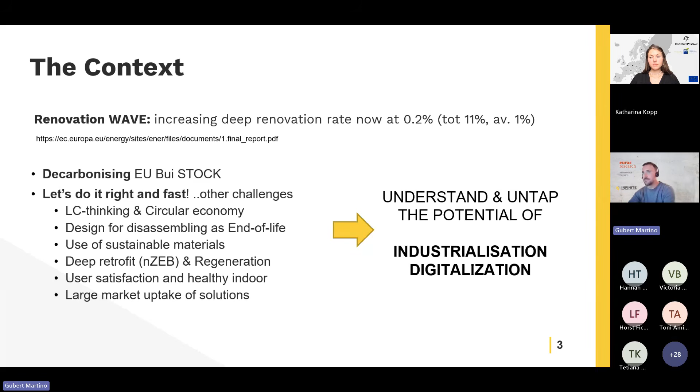We think the best solution is to go for industrialization and digitalization of the building sector. So the main concept behind the retrofit concept of Infinite is industrialization - moving the manufacturing of the renovation from the site to the factory, and then from the factory back to the site again, just to install it in a faster way.

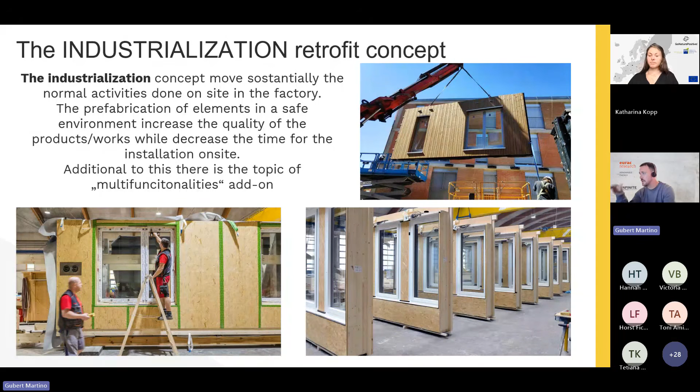The peculiarity of Infinite is also adding a set of multifunctionalities. So not just a passive prefabricated facade, but adding a set of multifunctionalities that I will present briefly.

Within the project we have 5 main pillars. We have stakeholder engagement in the center - all the activities we've done so far try to engage as much as possible all the stakeholders in the value chain.

Then we have a set of development technologies. We developed 5 different industrialized kits for the retrofit.

Then we developed methods and tools, so a BIM platform with a set of plugins to perform the analysis from the architect's point of view.

Then we have demonstrators - 3 real demo cases, one in Italy, one in France, and one in Slovenia, where we test these new technologies.

Then we work also on business models and exploitation - how these kinds of activities can go ahead in a sustainable way. Today I'm mostly focused on technology and demonstration.

So what are the technologies? We start with the prefabricated wood-based facade or roof element, and then the idea was to add 3 different cladding systems and integrating elements.

Regarding the cladding, we have the green, BIPV - building integrated photovoltaics, colored and hidden so you cannot see the cells - and then BIST, which is similar to BIPV but is solar thermal.

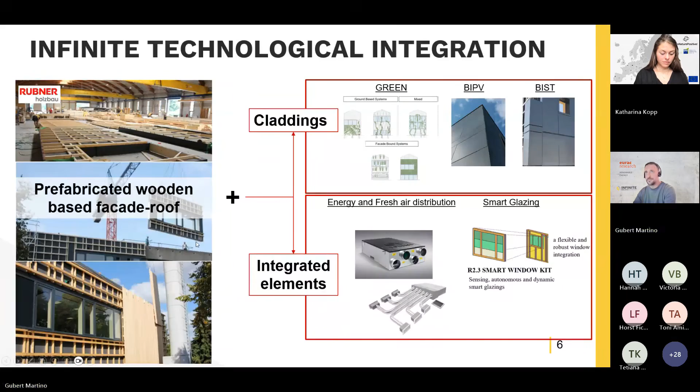So just some insight from the mock-ups we did. We did several mock-ups - I'm just showing the one that includes the green facade.

The concept for the green was a complex system based on several layers: the prefabricated wooden-based facade, and then at the external part we thought to include a green element.

So the first question is: which kind of green solution? We started to define a set of criteria for this green module to be applied to the facade.

First, it should have low weight, because the facade without any cladding is already around 60 kilograms per square meter. If you apply this kind of solution to an existing building, you can probably reach 80-85 without having any structural problem. So we need low weight, low thickness, because we already have insulation in all the layers.

We already have about 20 centimeters or so, so we cannot add another 30 centimeters, because otherwise we'd have problems with the distance to other buildings and so on. It should also be easy to install, have a reasonable cost, and the possibility to pre-install off-site.

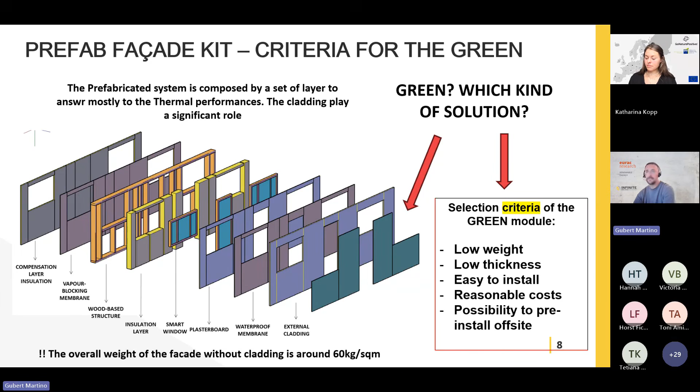We started the analysis and evaluated different solutions for the green. Self-climbing plants were not so interesting in the beginning, because the greening happened quite late. Then we looked at climbing plants, and then living walls.

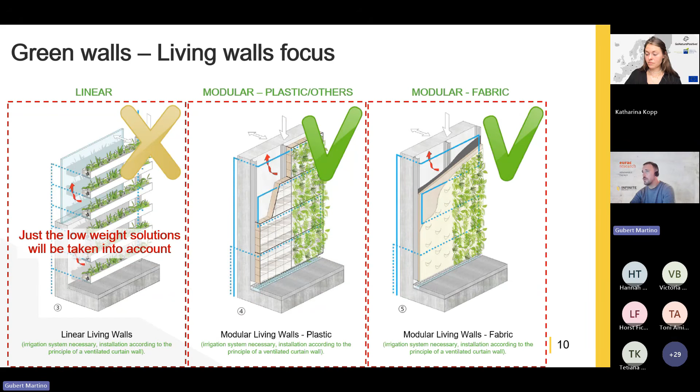Based on the criteria we selected, the most promising solution was living walls, but we kept climbing plants as a possible option too. We then determined that linear systems were not suitable due to high weight and thickness, so we moved to modular, fabric or not.

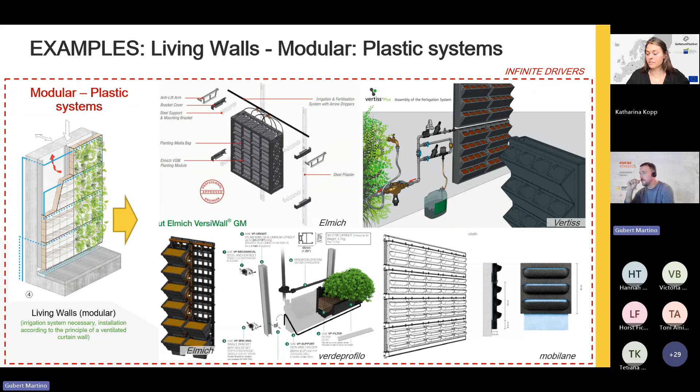This is an example of the sheets we produced, a sort of market analysis of different solutions that can be applied for each of the systems I presented before.

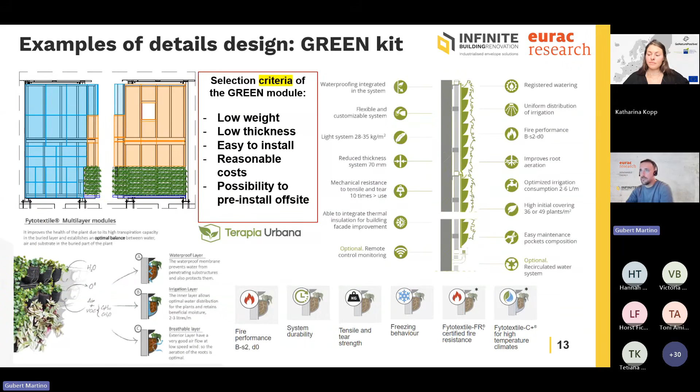Then we started designing the mock-up. It's a fairly large mock-up, 16 square meters, south and east oriented. In this case, we selected the Terapia Urbana solution, which matched most of our criteria.

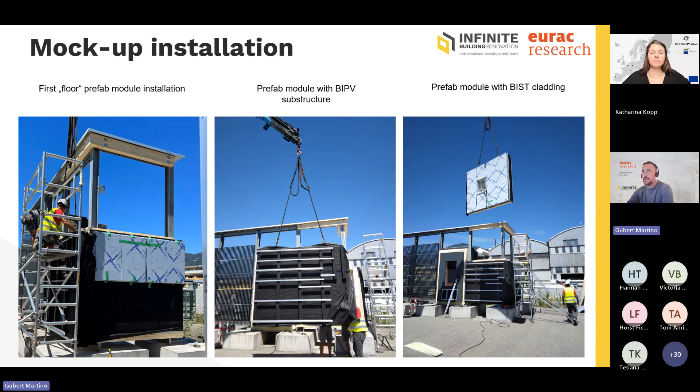We realized the mock-up at the manufacturer's factory as a prefabricated element, then installed it in our lab at Eurac, followed by installing the green element with all the plants within it.

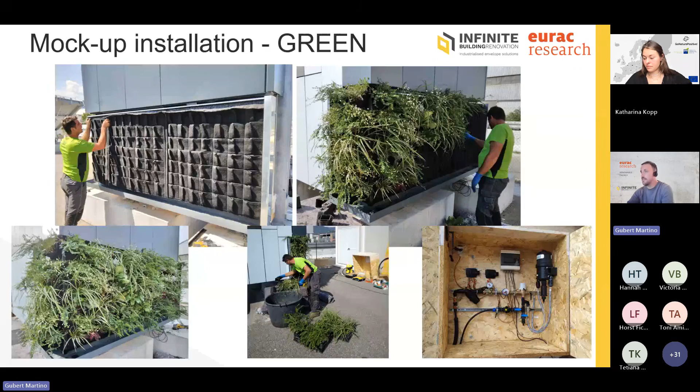We planned a very extensive monitoring campaign, monitoring the rear ventilation gap behind each cladding. The final result is this mock-up.

Based on the results, the green solution shows lower temperatures at the back of the rear ventilation gap, but we are still working on writing a paper on this topic.

Jumping to the end, I'd like to show real cases we are doing right now in Infinite, just to demonstrate the potential of this industrialized approach. We have three demo cases.

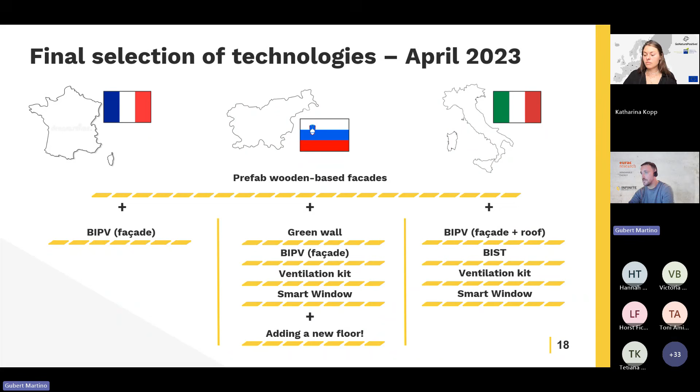I will focus mostly on the Slovenian and Italian demos, since the French one is only related to the BIPV facade. We coupled different kits in order to retrofit the buildings to ZEB level.

First is the Slovenian demo. As you can see, it's a quite large building with low-income people living there. Here we applied a retrofitting concept with prefabricated facades, but also a densification concept.

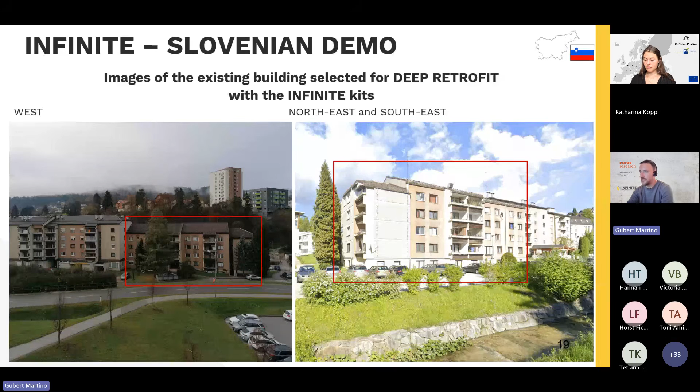The concept was: remove the roof, add a new floor, and then apply all the retrofit solutions in order to achieve the ZEB level. We did this last year.

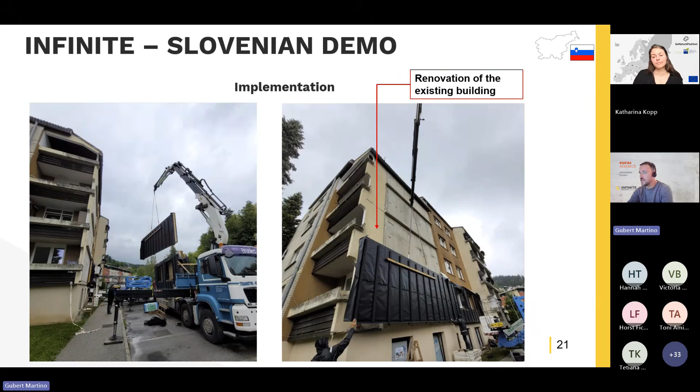These are the prefabricated facades just attached to the existing building with quite large insulation panels. For the upper floor, we also realized prefabricated elements with ducts and ventilation units embedded at the factory, adding an additional floor.

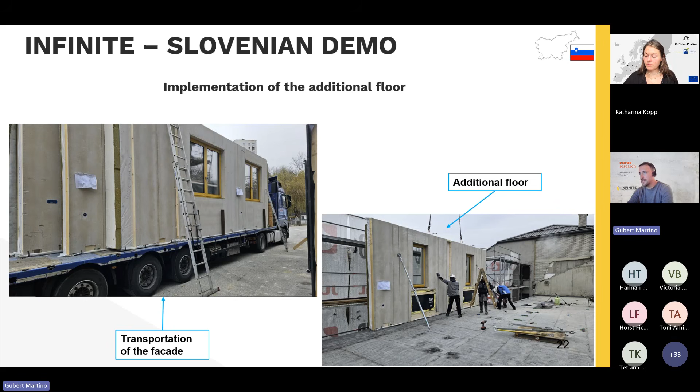On the upper floor we realized 6 new apartments that the building owner sells to pay for the rest of the building retrofit. It's a very nice business case we're evaluating now from a cost perspective—we'll run some simulations and give more feedback in the following months.

Regarding the green solution, in that case we only had the opportunity to install a very small modular element, but it was still interesting for the owner, since this kind of solution could be added on terraces to create a small green space, possibly providing some refreshment during summer.

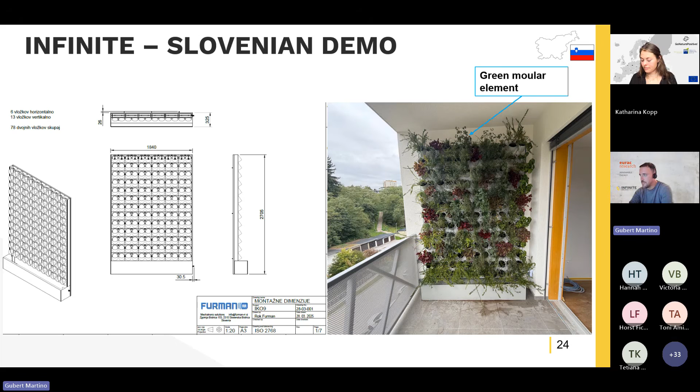Regarding the Italian demo, it's quite a small building, but we applied the full solution we had. In this case we couldn't add a new floor due to structural reasons, and also due to structural constraints we had a weight limit on the facade.

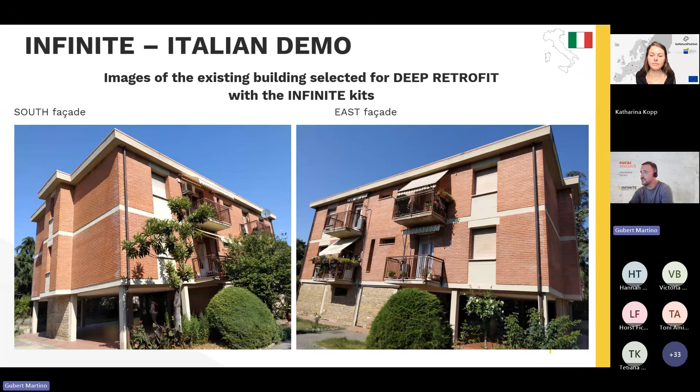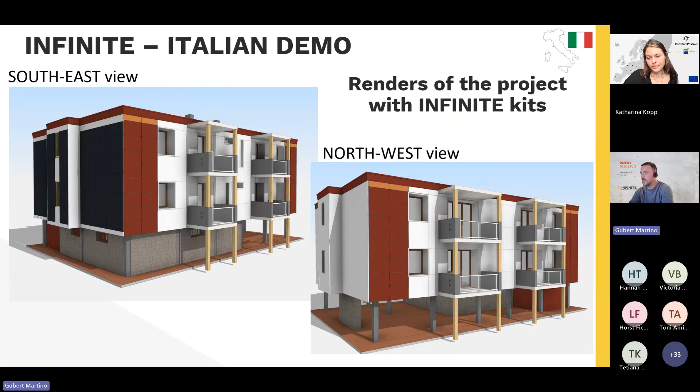The concept was to cover the building and create new balconies with the ventilation unit embedded into them. We had a very extensive design—as you can see, there's a double skin all around the building with these prefabricated elements, which was quite nice to integrate.

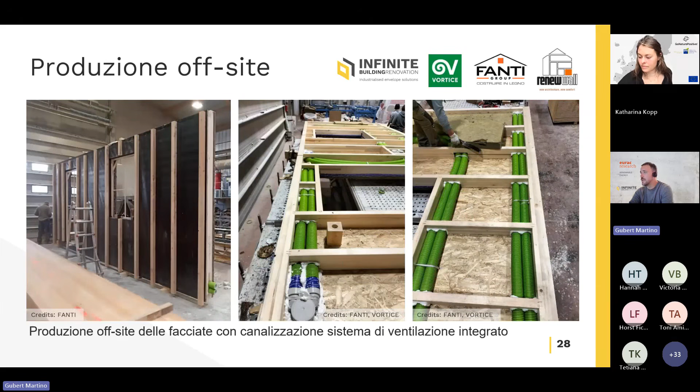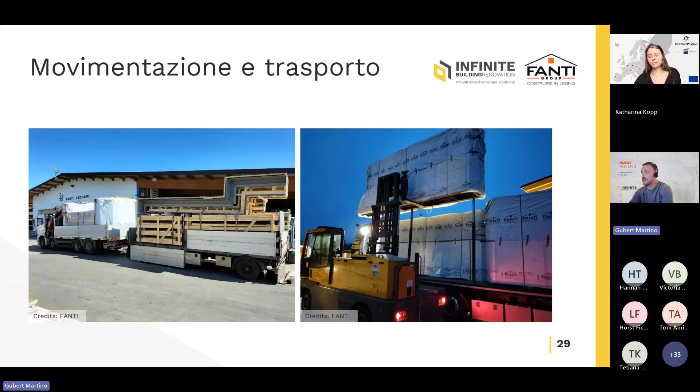We realized it in the factory in North Italy, including all the pipes within the prefabricated wooden base facade. Then there was transportation from North Italy to Florence. Then from Florence, it was just applied to the building.

That application was very fast. Of course, the preparation of the sites takes a bit of weeks just to prepare the buildings, but then the installation of the facade itself takes just a few days. The level of prefabrication was very high, so we arrived at the end having very nice results.

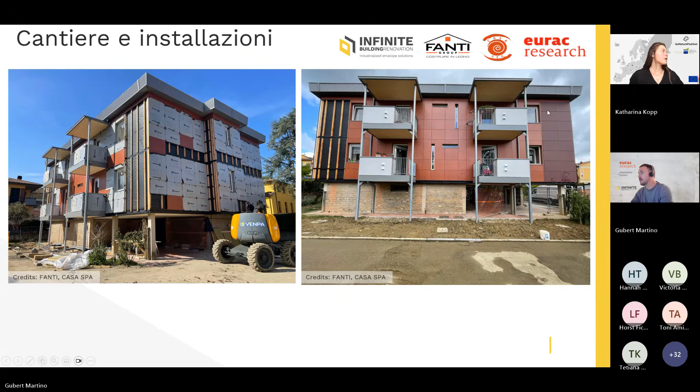In this case, as you can see, we remove the protective film of the passive cladding. And on the right, you can see the photovoltaics, that is the dark red, and on the left is still to be installed, but we installed it at the end. So that's the final version.

You can see on the back the old building that was the twin building, so you can see before and after. This took just a few months to be realized and finalized with a heat pump, with the photovoltaics to feed the heat pump. This is a very great result.

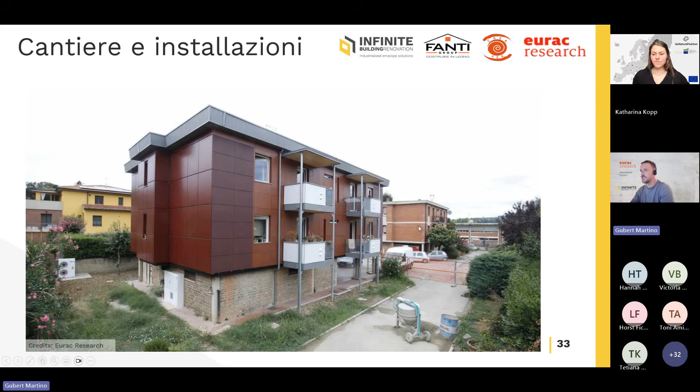Then I'd like to give you some pointers regarding lessons learned, both from mock-ups and from the demo implementation that we have so far, just to start the discussion. At the mock-up level, I was focusing mostly on the green kit because this is the main topic of today.

We realized that the type of cladding can really deeply affect the maximum weight we can apply to the existing building. In the beginning you think you have all the space you want to apply this kind of solution, but in reality the engineer said that the maximum weight you can apply is 80 kilograms. With 80 kilograms, that kind of facade is a challenge.

Regarding the green solution, except for the fact that living walls can have a very low weight, in general they are quite heavy. Probably an interesting solution that we are discovering now and pushing is climbing aids, even if they take a longer time to cover the facade with green.

The living wall is a very nice solution because it's interesting due to easiness of installation, thickness, microclimate that can have in the surrounding, weight, and final aesthetic. But we discovered that there are some topics to be highlighted.

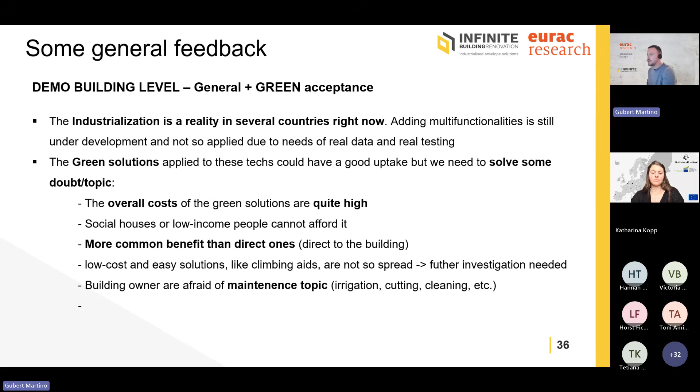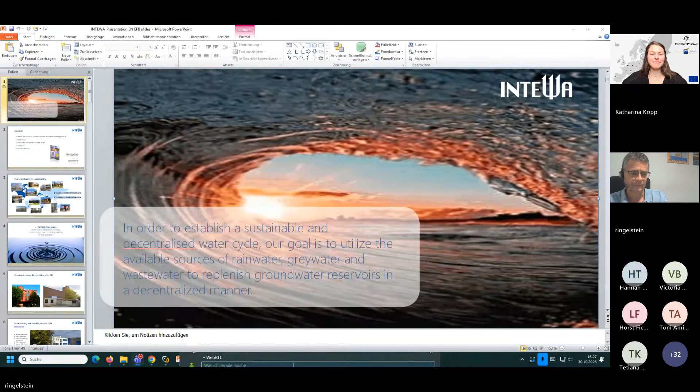Okay, good evening all together. And thank you, Katharina and Martino, that was very interesting.

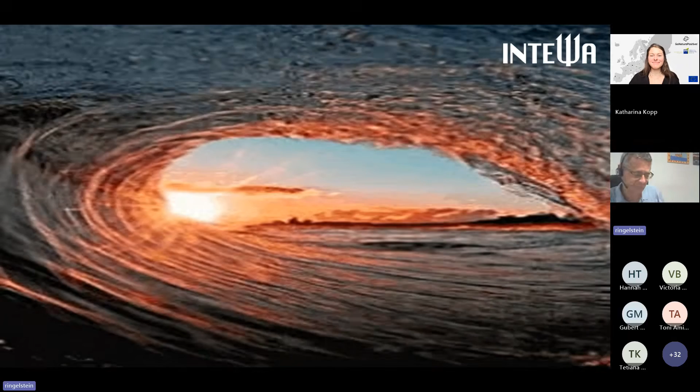What you can see here is the water loop. This is our vision and plan: we want to close the water loop. What we do, on one hand, is use all the water sources we can get. This can be either rainwater, grey water, or wastewater now. And also we want to get rid of heavy rainfall events to avoid flooding, which is a big topic today due to climate change.

In this presentation, I'll give you a quick overview, I only have 15 minutes. First, I believe our case study, the INTEWA building, is interesting, and we want to answer the question of whether it's possible to be water self-sufficient and energy neutral in our own smaller company building. Then I'll give you a quick overview about water reuse and then head over to stormwater management and water storage technologies, references, and maybe also some future visions, research and development projects.

Our systems now contribute to sustainability a lot. We've been 30 years on the market, and all the systems installed now save more than 5 million liters of water every year, and we infiltrate more than 8 million cubic meters of water. So we've done something, though it's not a lot compared to big cities. We have a lot of work for the future to do.

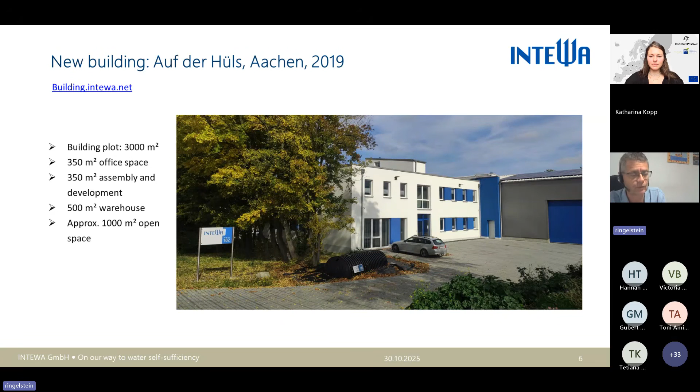It is a 3,000 square meter plot, 350 square meters office space, assembly and development 350, and so on. So we have about 20 people, 20 co-workers, in this company.

First, what we have installed is our own potable water from rainwater system, and this is something special. Probably we're still the only company in all of Germany doing this. Why? It's not that it's so difficult, it's more the question of regulation. But we did it.

And so what you can see here is the rainwater harvesting tank and our treatment unit. It's an ultrafiltration, active carbon, and UV system.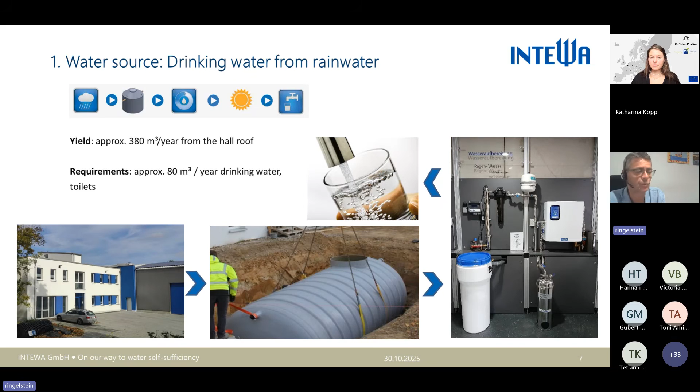And with this technology, we get the best water you can imagine from our own roof. But we want to demonstrate what else you can do. For example, the wastewater normally goes into the public municipal sewer system. Here we've installed our own small system, and we recycle the water. It's reused now for toilet flushing, irrigation, and so on, so for reuse water qualities.

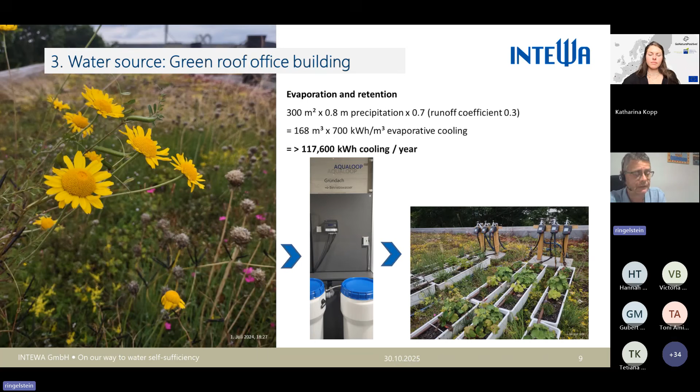The green roof is also a water source. Of course, the green roof has other advantages too, such as cooling by evaporation. But a certain amount of water is collected in a separate tank, and we can use this water again for irrigation of the green roof.

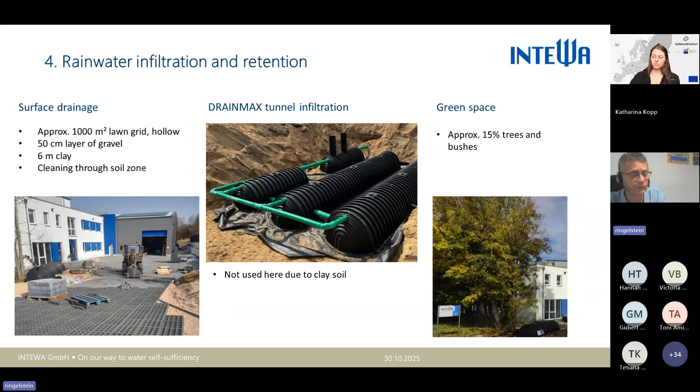We also have, of course, some areas — 15% with trees and bushes and so on.

Only a quick note on the energy topic. We have a deep hole drilling to 100 meters to get the warm water. It's not geothermic water, it's simply the temperature of the surrounding ground. We have a heat pump, and underfloor heating and cooling. With the same system, we also cool our building down with nearly no energy, because we have a high COP of nearly 6. You can also see results in a study from the University in Berlin on the building.

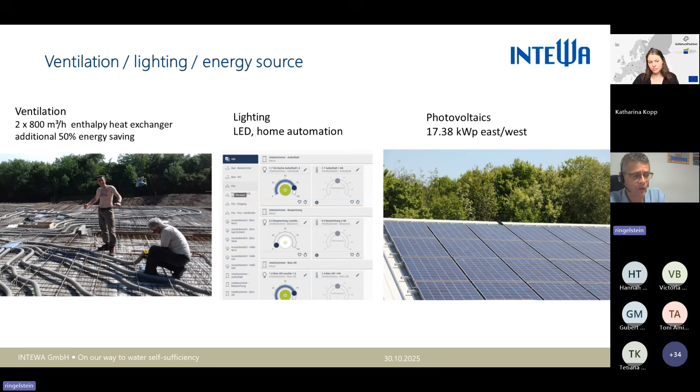We also have ventilation with a heat exchanger, which makes a lot of sense — this can save another 50% in energy. And our own PV system, tiny compared to others: with only 17 kilowatts, we can cover the whole consumption and even give 3,000 kilowatt hours per year back to the supplier.

So altogether, with the building, yes, we're water self-sufficient. We are energy neutral, though not energy self-sufficient since we don't have batteries yet. Most interesting is here on the right — you can see how much we have to pay for the building: less than 500 euros a month, which is less than 5% of the cost for the same situation with the old building. So it's really price-wise very interesting for us too.

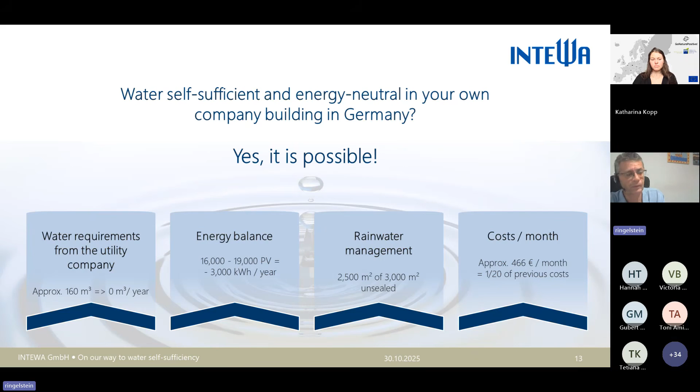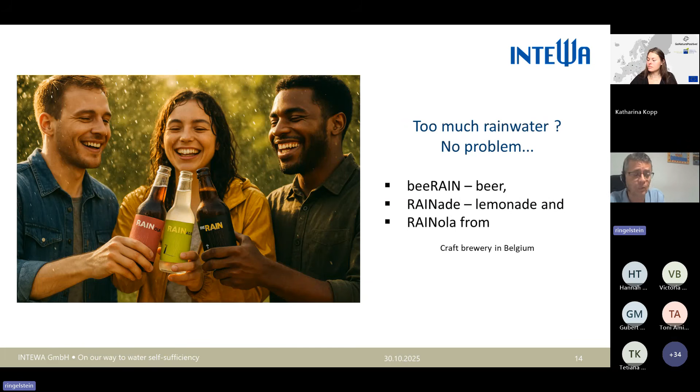Then we have a funny marketing idea. If there's too much rainwater — and with our roof, we do have too much — while most southern European countries don't have enough rainwater available, what we've done is brew beer in a small craft brewery in Belgium, and also lemonade and a kind of cola. But again, this isn't really to sell — it's more for marketing, to show people that you can do much more with rainwater than simply flushing toilets.

For water reuse, we focus on medium-sized systems — commercial scale, maybe up to 50 cubic meters a day, within a standard range we can serve. We also deliver and offer other systems, and we use those technologies now for grey water recycling, potable water production, adiabatic cooling, and reuse of wastewater from existing sewage treatment plants, for example.

The idea of complete systems came about over the last, let's say, 10 years. In the beginning, we delivered only components, then customers said they needed complete packages, otherwise it's too difficult — and it's also cheaper if we deliver the complete package. Here you can see a sample greywater recycling system. I don't have enough time to explain the technology, but it's quite simple — it's a membrane bioreactor, so biological treatment and membranes, roughly.

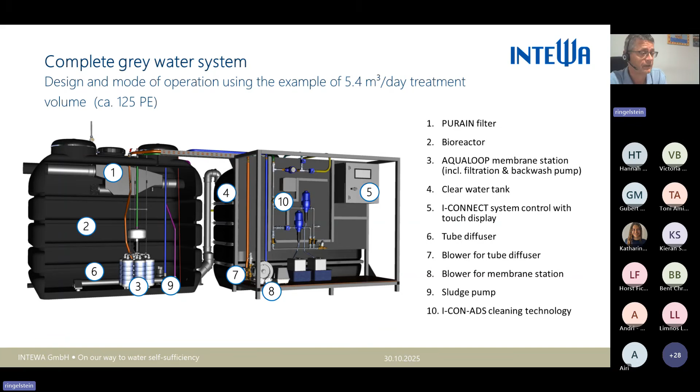Interesting is that with the greywater recycling system, you don't need a lot of space, especially for countries in southern areas, but also for bigger buildings, and especially for all the buildings now with green roofs, where we don't have enough rainwater anymore. Here, greywater recycling is getting more and more popular and interesting, and as you can see, we do not need a lot of space for these systems.

Let's say with a 5 cubic meter system a day, which is for around 125 people, we only need 10 square meters for this system size. For a rainwater tank, you would need at least 20 times more rainwater harvesting storage volume.

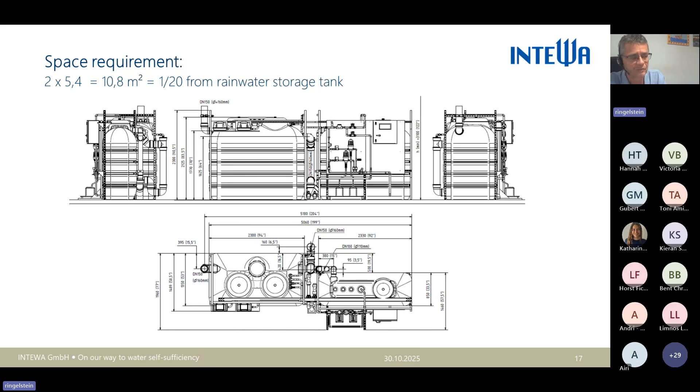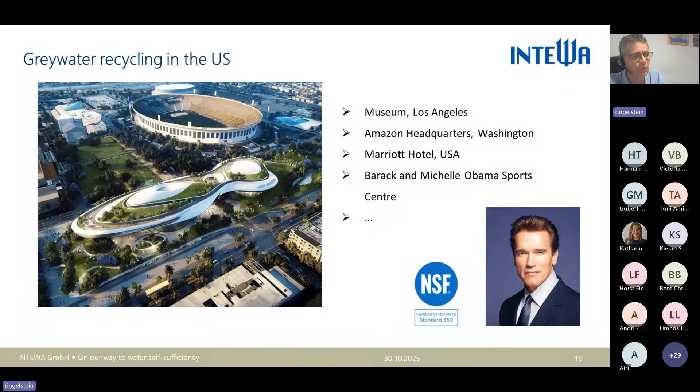Why? Because greywater recycling is mandatory in Los Angeles and some other cities. And the reason here is somehow funny - it's Arnold Schwarzenegger, because he was governor in California. So you can see that regulation very often is the driver for being able to sell our components.

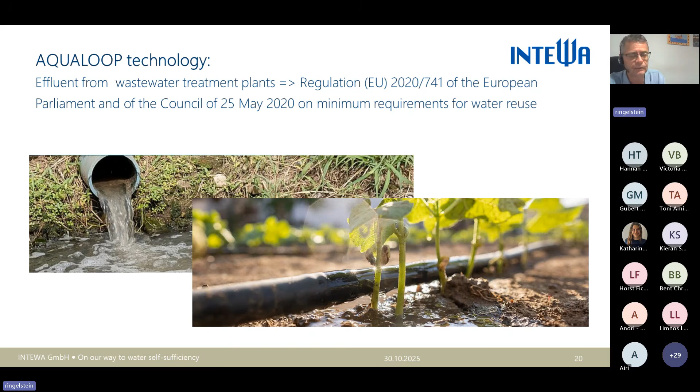So this water is necessary, it's mandatory. We don't have enough. We need more water to irrigate all the plants you want to plant.

But rainwater - this is the wrong headline here, excuse me - so here it's about potable water from rainwater. It's getting more and more popular.

For example, you can use it for adiabatic cooling. The big advantage with rainwater is that the water is very soft, so you can save a lot of treatment, which makes the process interesting. Also the components are saved - you don't need the softener systems anymore.

Here's a nice example, let's say in LA again, for this adiabatic cooling system. And this is also a system we are proud of - it is the Rimac company in Croatia.

They decided to install a potable water from rainwater system for the whole factory. So it's 100 cubic meters a day, and they deliver the water now for the building, for everything. This is a nice reference for us, to demonstrate that it is possible today in Europe.

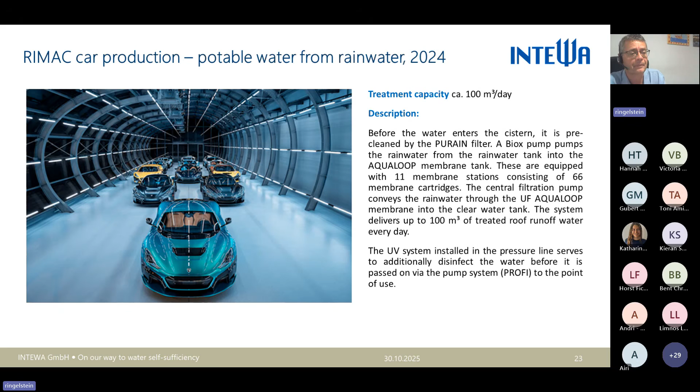So in Germany, difficult, but in Croatia, suddenly possible. All the other countries will follow as well. So now, this was the information about water reuse, and now the information about stormwater management.

Stormwater management is the opposite of water reuse. Here we want to get rid of the water, of the heavy rainfall events, to avoid flooding. And we have developed this plastic part.

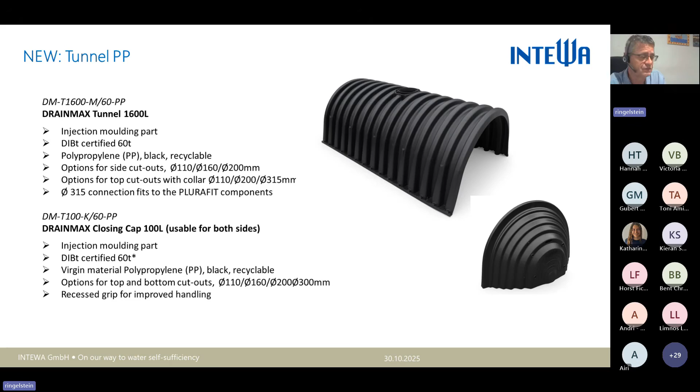It is a 1,600 liter tunnel, and you can bury this in the ground. This is very strong - it's DIBt certified. You can drive upon the system with a heavy truck, 60 tons for example, and so on.

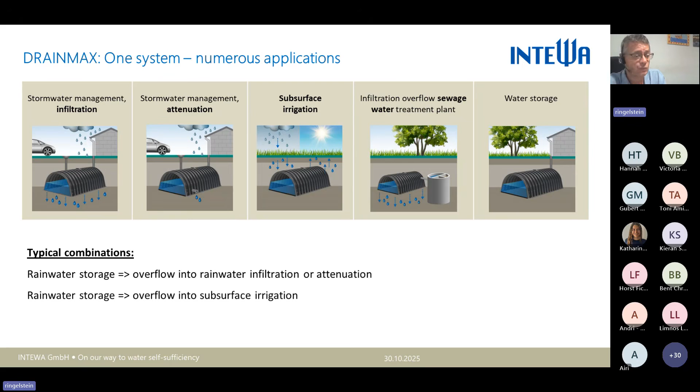And you can use this system now for different applications. You can install an infiltration system, attenuation, where you can't infiltrate the water into the ground. Subsurface irrigation is a system where you can combine the attenuation and irrigation, the infiltration also of the sewage water treatment plants' overflow, and now also water storage.

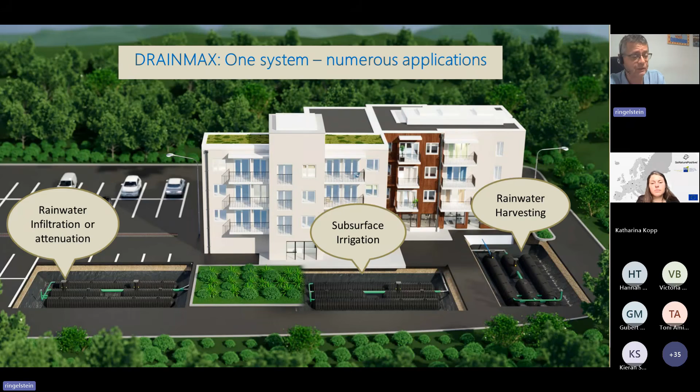Here's a picture of how this capillary underground irrigation system is working. So the water is more or less flowing in two directions. If you have heavy rainfall, the water goes into the system, and later through the capillary effect, the water goes to the surface, and then you can grow plants or you have evaporation.

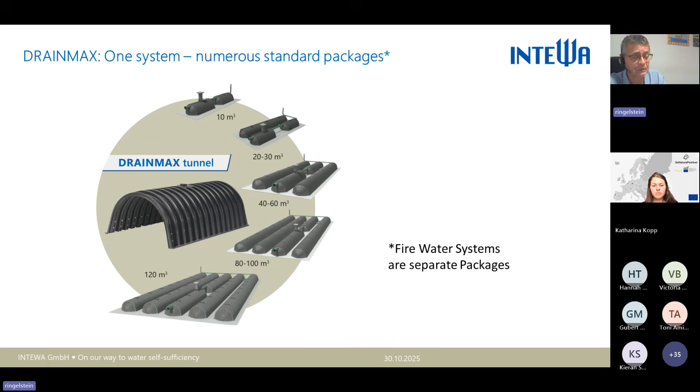The whole system, we offer as well as packages. This is to make it simple for the planning engineers. Of course, we can also offer special design systems. Such a package normally has a pre-filter section already installed, the distribution section, and then a ventilation and maybe attenuation throttle.

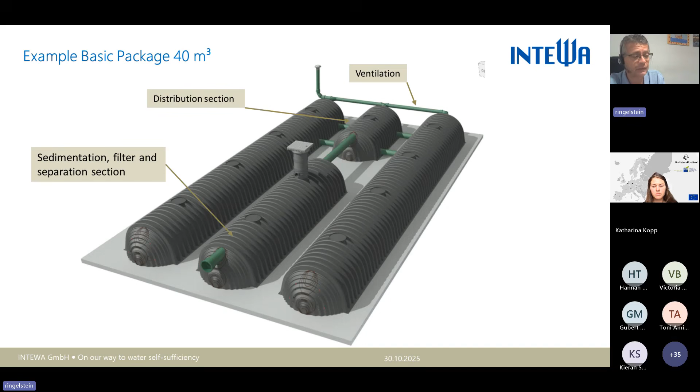This here is the pre-filter. This is the throttle if you have an attenuation requirement, so if you're not allowed to release all the water into the ground. And then we have a special EPDM liner to seal the system.

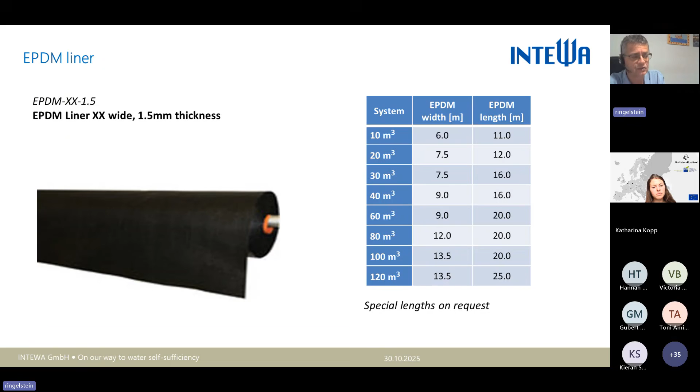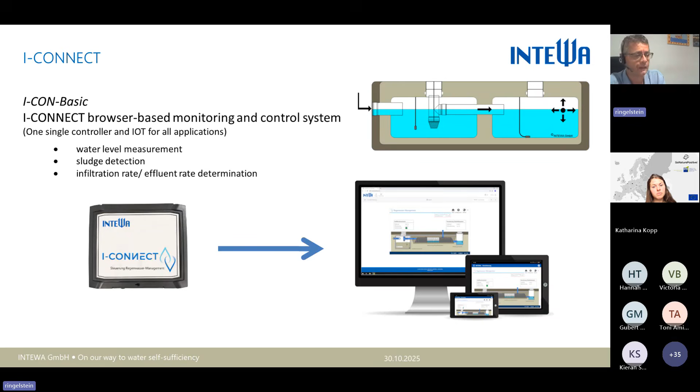And interesting is also the I-CONNECT. With the I-CONNECT, you are able to check the system if everything is okay, so you don't need to visit the site - saves a lot of money. And in case something is clogged or blocked, you can visit the site and clean the system.

So now, this is what we have done, but we are also working on research and development. This is a quite big project, something around 10 million as well. We call it AIX Network for Wastewater Reuse, because we understood that rainwater harvesting is not sufficient anymore, and grey water recycling is not sufficient anymore in the future due to the demand for water from climate change. We need to go a step further, and the step further is to recycle the complete effluent of the wastewater treatment system.

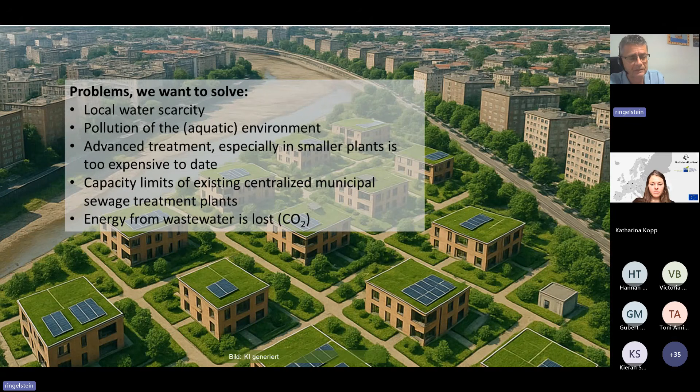Here is a scenario of how this should look like in the future. We want to develop systems that are not completely decentralized, so not just for one building, but something in the middle of the municipal system and the decentralized system. We speak about a semi-decentralized system, meaning several buildings are connected to one system, and then we can use the water for different applications.

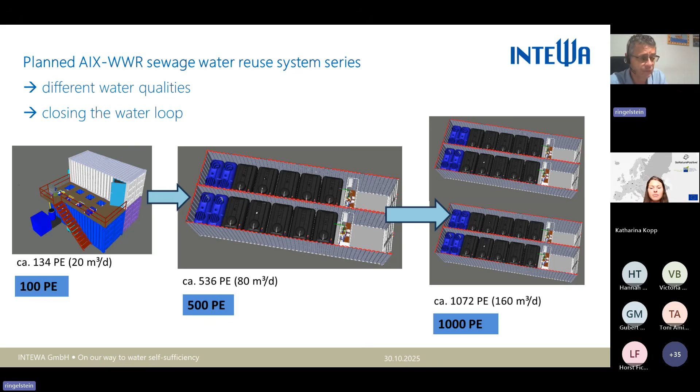What is the plan? The plan is that we develop a range of water reuse systems from medium size to 100 people, maybe up to 1,000 people, to close the water loop and implement, let's say, the water utility model. So the operator now is not the owner of the building anymore in the future - this is the vision, but the operator then is the water utility.

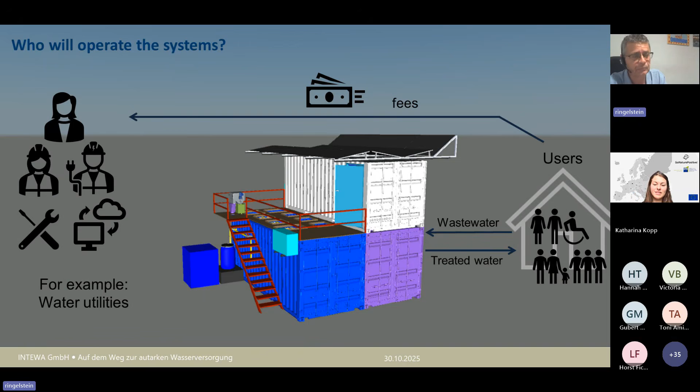And what is the reason for this? The main reason is that it's all about money, as you know, and someone needs to earn money with the water and also with the wastewater. If we do everything by ourselves, then the water utilities, let's say, are competitors, and this is not feasible for the future. If you want to save water, we have to get everybody on board, and only with this vision and plan are we able to recycle most of the water and do this in a professional manner.

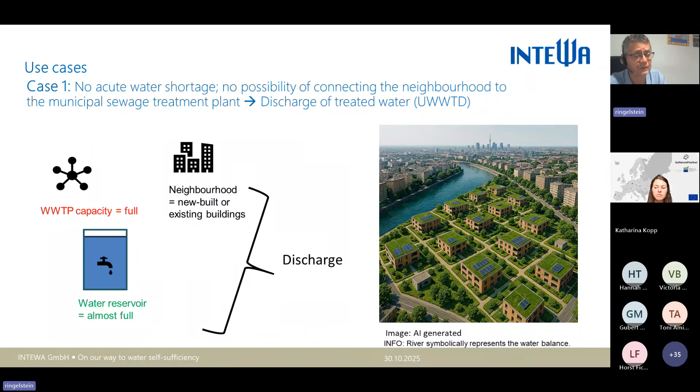Here we have some use cases. One use case is: we have enough water, so the river here is an example - the river is still full, it can also be the groundwater. What do we do with our system? We only discharge the water, but with a high quality, so we will fulfill the new requirements with the small systems as well to protect the environment, and not say 'okay, small systems can discharge water with bad quality because there's no regulation.' In the future, this will change anyway - we can only discharge clear water.

The next case is a shortage, so as you can see, rivers more or less are getting empty.

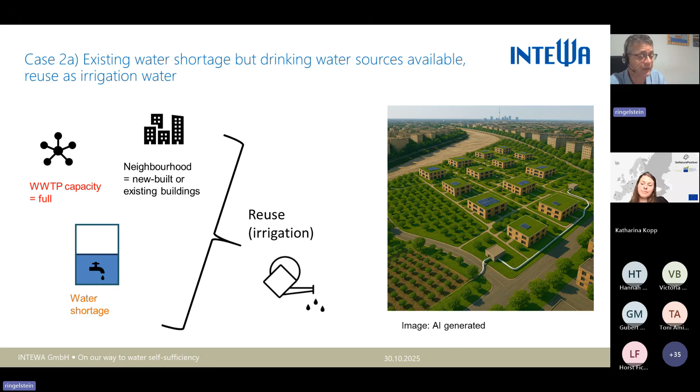And here, of course, we have to reuse. We can retrofit the building, and with a retrofit, we can use the water for irrigation. If we have a new building, we can also use the water for reuse, so toilet flushing, washing machine, and so on, because we need separate piping. Or in case of acute water shortage, we have to reuse the water completely and deliver potable water quality.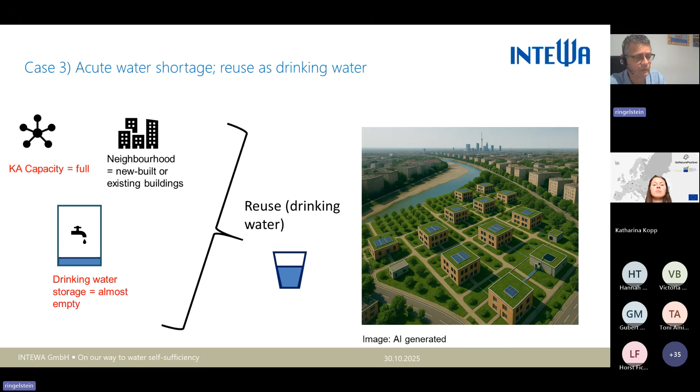Then some interesting word is this AHA. AHA is the old German word for Aachen, and Aachen is the city where we are from. It's funny, nobody in our city knows this. When you walk around and ask people what Aachen means, nobody knows. But the old German word Aha means water.

And this is the last slide of my presentation. Look forward to any questions or comments.

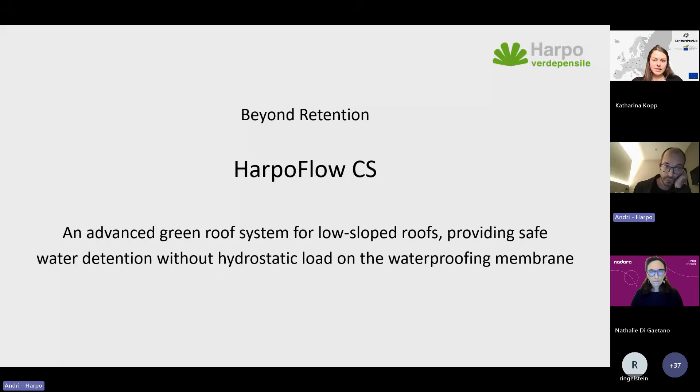The last one this year corresponded to a 15 year return time event. So to sum up, in 11 years, we have faced 3 thunderstorms of such high intensity that we would have expected to see them occur only once in 15 years. I think this is the best representation of what climate change is.

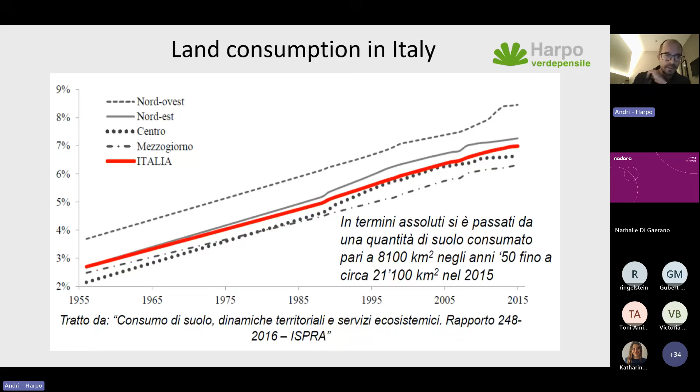We also have another big problem. This red line represents the land consumption in Italy from the 50s to nowadays, and we can see that probably only in the last few years we have a slight decrease in this trend. This is the result in our city - the result of both increased impervious surfaces and higher frequency of severe thunderstorms. And the result is flooding, no way around it.

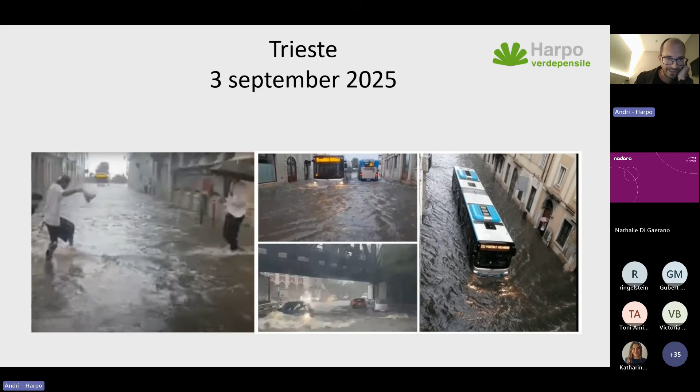So how can we manage this problem - which is the main urban mitigation measure? At the moment, probably stormwater attenuation tanks. And how do they work? We have an intense rain that generates a strong runoff, and the local regulation imposes a limit.

You can see this wonderful animation. This regulation imposes a limit to the discharge flow rate. I think it is worth noting that the regulation not only imposes an upper limit, but also a lower limit. So this tank is not a retention basin, but a detention one, since it must empty in a maximum of 48 hours. Since the required volume is merely given by the difference between inflow and outflow, in this sector we can say that flow rules, not volume.

Volume is just a consequence of the flow, the discharge flow rate regulation.

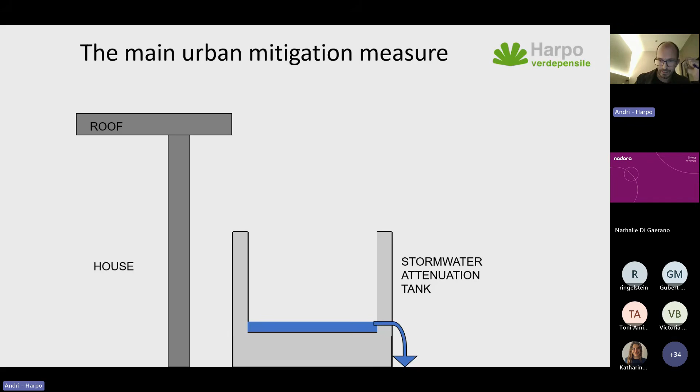If we want to scale down both the tank and its outlet from a so-called catchment scale or roof scale to a bore dimension that we can fit in a green roof stratigraphy, we face a big problem: the outlet risks becoming so small and tight that it is strongly prone to rapid clogging.

So what is our solution? We have developed this tray-based system with a very small water basin, 1.2 square meters for 5 centimeters depth.

It is combined with a detention channel with a very low hydraulic gradient, with important friction losses due to the combination with a special porous material which has a very wide pore dimension, up to 2 millimeters diameter, and an extensive network of interconnected pores. So these small but not so small channels are also very redundant, and the open dimension and redundancy make it very tolerant to clogging.

Finally, we put singular losses by abruptly changing flow direction in this channel. We have tested this new system in our facility in a rain chamber, and now I'll show you the result.

Here you can see two graphs. With this graph, we can compare two hydrographs. One on the left, generated by a normal intensive green roof with a double cuspated drainage board and substrate of 20 centimeters thickness. On the right side, we have this new system, which we've called HarpoFlow CS, with no substrate, so just the tray by its own.

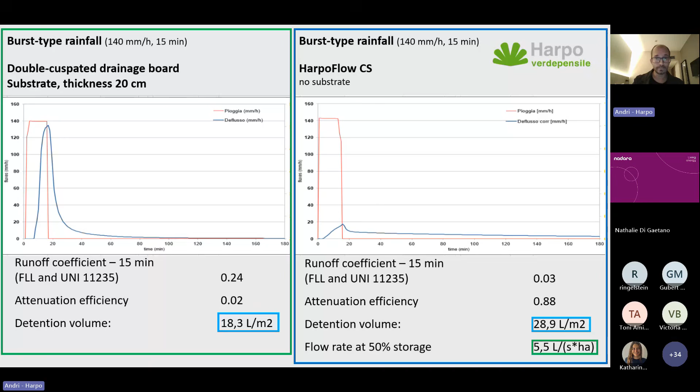In these two graphs, we can see the same two systems, but in reference to a volume-dominated rainfall, meaning a very long rainfall of 7 hours with small intensity, in this case 18 millimeters per hour.

In this case, we can see that both had very good performance for the runoff coefficient, because no water exited the system in the first 15 minutes, but not so good - in fact very bad - performance for the attenuation efficiency.

This is because in this very long precipitation, both systems reached maximum detention capacity, and since the drainage was correctly working, the inflow equaled the outflow.

But if we look at the detention volume, we can see that the intensive green roof had a much worse performance, while the HarpoFlow CS kept a very high detention volume - 33.5 liters per square meter, not including the water that can be detained by the substrate if you add it. And the median flow rate was still within the range imposed by the regulation.

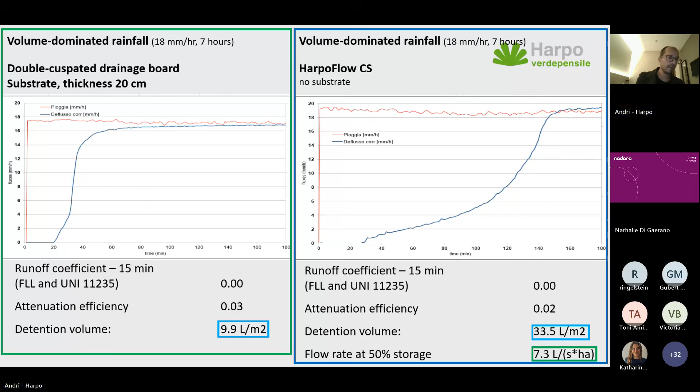Here I want to speak of another important characteristic of this new system. First of all, it has a very low slope sensitivity, since it is confined in trays. We can also put it on sloped roofs, and we can still make all the roof area detain water. This would not be possible if we use the restriction on the outlet of the roof.

In that case, in a sloped roof, we would have detention only in the distal part of the roof. Since HarpoFlow is confined in these trays, it is a redundant system, so it is very resilient, and every tray is independent. The discharge of every tray is already balanced with its tributary area.

On the contrary, if we want to work by restricting the outlet of the roof, we are in a case quite failure prone, because we have very few critical water openings, and the flow regulation requires a regulation, because the ratio between the outlet and the tributary area is not constant. So you need a mechanism to regulate this flow.

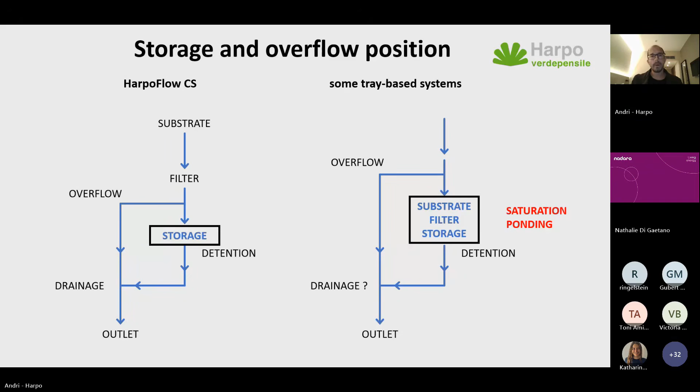In which cases, in Italy, can we use HARPO Flow? We have different kinds of regulation in Italy. One is the UNI norm for green roofs, which is mainly concerned with the necessity to design and dimension the performance of drainage and outlet. In this case, using HARPO Flow even in a small part of the roof can contribute to the reduction of the peak outflow, and hence help to lighten the drainage problem at the outlet.

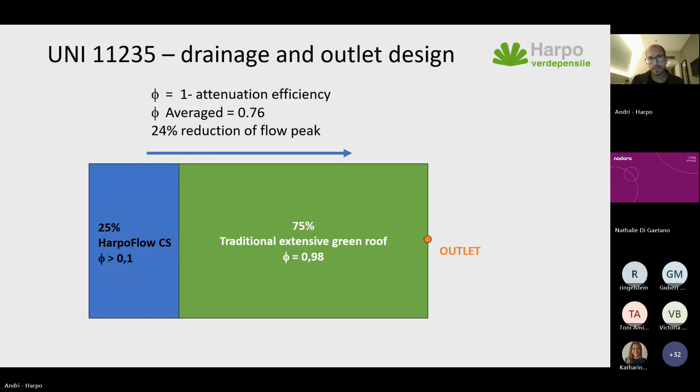Another kind of regulation in Italy is runoff based. For example, the RIE protocol is a score based on the abundance and quality of green and permeable surfaces. So the designer has to state the ante-operam RIE score, and at the end of construction, it is necessary to guarantee the accomplishment of a minimum, good, or excellence RIE score. This score is obtained using the runoff coefficient.

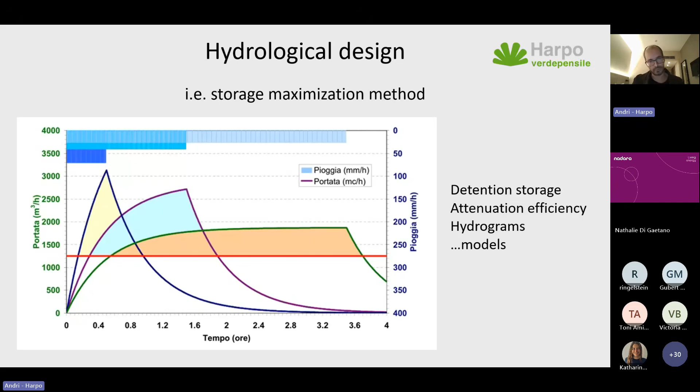Finally, there are regulations which instead require a strong hydrological approach, for example using the storage maximization method. In this case, we can give the designer the detention storage volume, the attenuation efficiency, the hydrographs, or even models to describe dynamically what happens to this runoff wave. We are still developing the models, but I think they will soon be available.

Finally, I have finished my presentation. I just want to make a small recap of what I've said. So this is not a tray-based system. We have no water head on the waterproofing membrane, so no risk of infiltration. We have no strong restriction. The system is redundant and therefore failure tolerant.

It is very good for drainage improvement on the roof because it has a very high drainage capacity and a strong capacity to reduce the peak outflow. It can guarantee a good detention storage, 33 liters at least if used on its own, but we can also sum up the contribution of the substrate.

I want to state and recall that a green roof can have a good performance for detention of the water that falls exactly on the roof, but is not responsible for all the water that falls on your catchment. So it is not possible to think this system can eliminate the necessity to build a detention basin at the end of the catchment, but we can reduce the dimension of that detention basin.